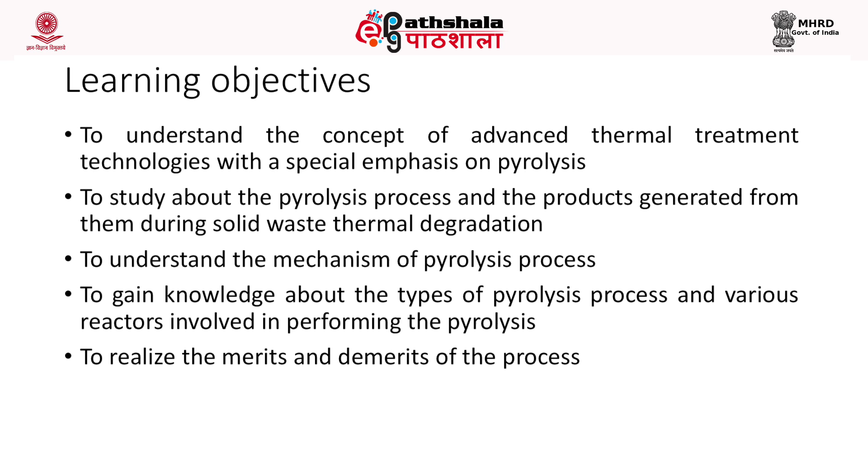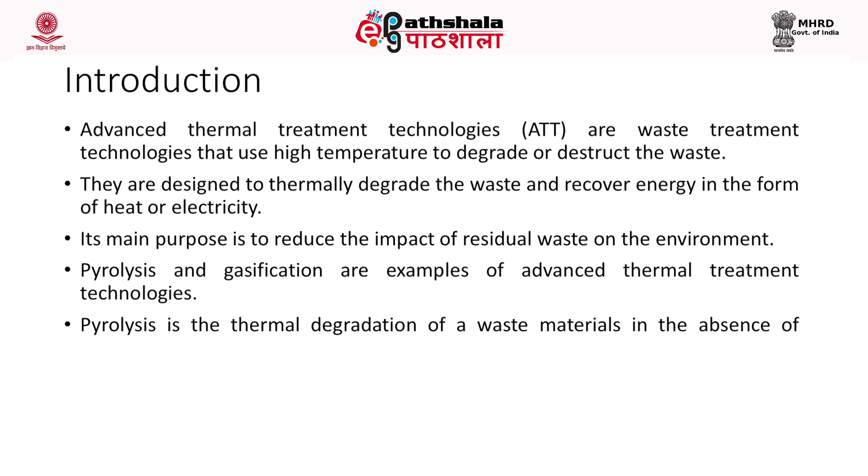As I told you earlier, advanced thermal treatment technologies are waste treatment technologies that use high temperature to destruct or degrade the waste. They are designed to thermally degrade the waste and recover energy in the form of heat or electricity. Its main purpose is to reduce the impact of residual waste on the environment. Pyrolysis and gasification are examples of advanced treatment technologies.

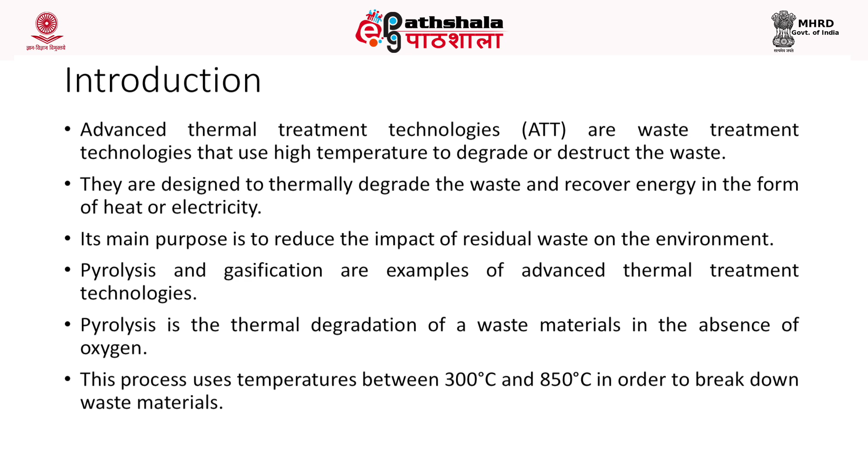Pyrolysis is a thermal degradation method where the waste is destructed or degraded in the absence of oxygen. That is nothing but burning the waste in the absence of oxygen at a very high temperature of 300 or 350 to 850 degrees Celsius.

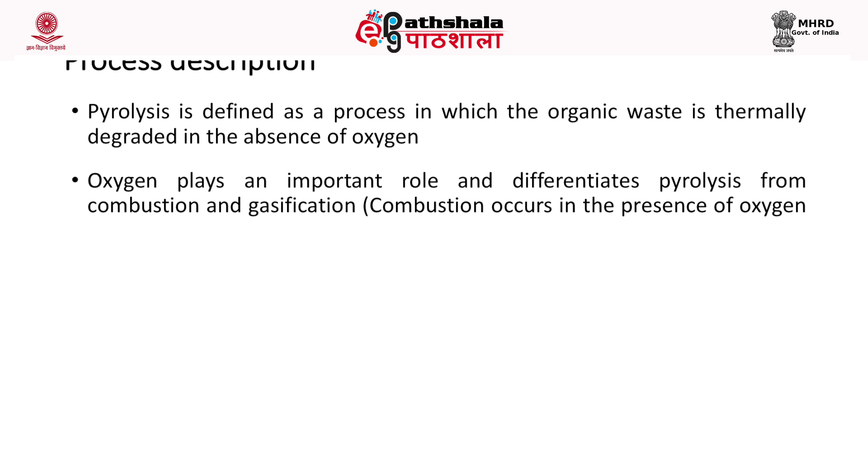Now, the process description: pyrolysis is defined as a process in which the organic waste is thermally degraded in the absence of oxygen. Oxygen plays an important role and it differentiates pyrolysis from combustion and gasification. Combustion is nothing but burning something in the presence of oxygen, whereas gasification or pyrolysis is degrading or burning the waste in the absence or a limited supply of oxygen.

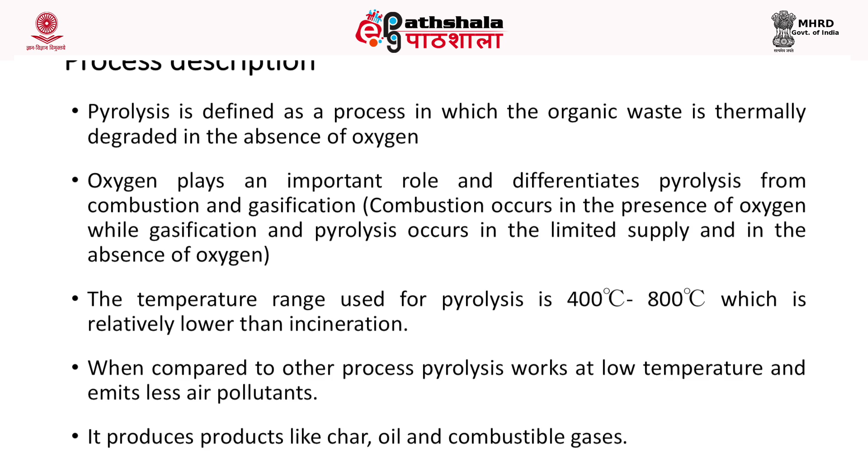The temperature used is generally between 400 to 800 degrees Celsius, which is comparatively lower than incineration. When compared to other processes, pyrolysis works at low temperature and thereby emits very less air pollutants, unlike incineration. It produces products like char, which is solid, oil, which is liquid, and combustible gases. It's a flexible process with the ability to produce these three compounds at varying levels by altering operating parameters such as temperature and heating rate. It also transforms low energy density waste into a biofuel of high energy density and high value chemicals.

These products that are produced at the end of the pyrolysis process have a wide range of applications in fuel application, as a chemical feedstock, and other energy extraction processes.

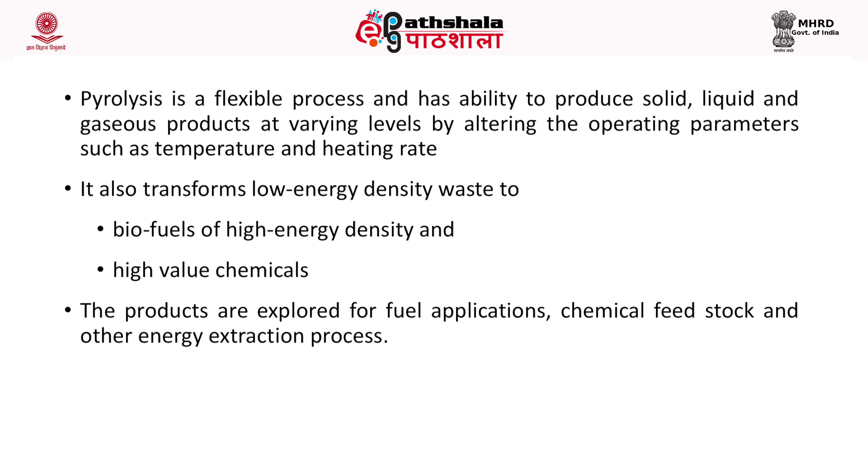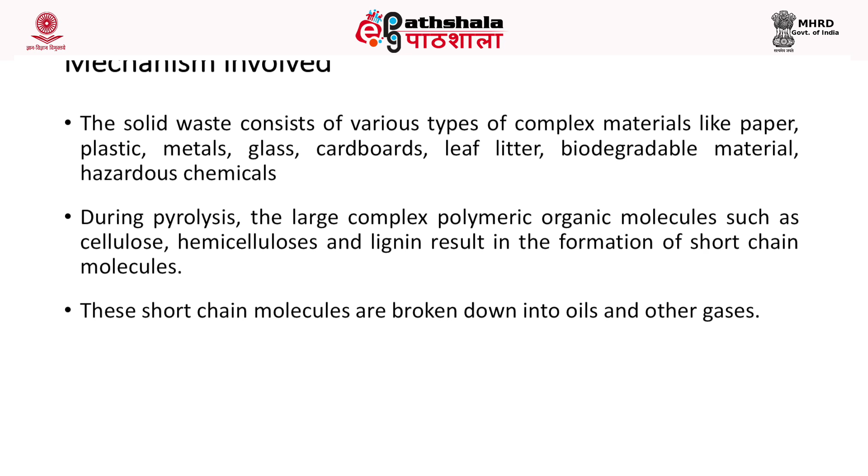The mechanism involved during pyrolysis is that solid waste, which consists of many complex materials like paper, plastic, metal, glass, cardboard, biodegradable material, hazardous chemicals and more, undergoes breakdown. The large complex polymeric organic molecules present in these materials, such as cellulose, hemicellulose, and lignin, result in the formation of short chain molecules. These short chain molecules are further broken down into solid, liquid, or gaseous products. Now let's discuss the various products produced in detail.

As I told you, pyrolysis produces three different products: char, oil and gaseous product. First, let's discuss char.

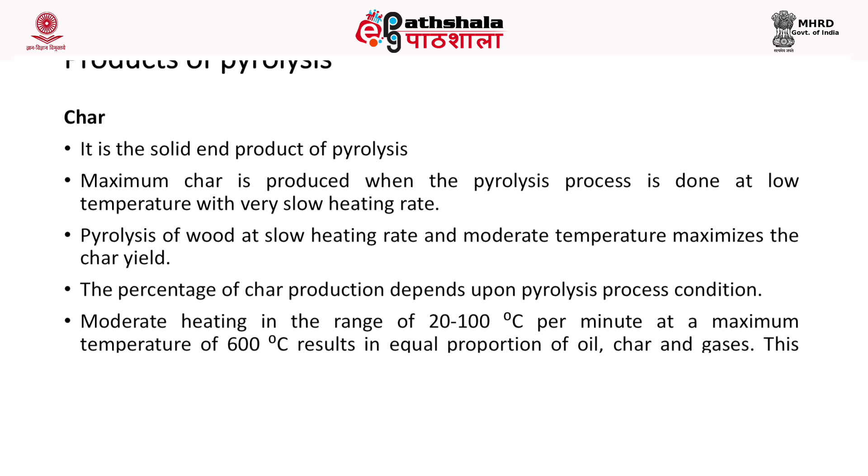Char is a solid end product, and the maximum char is produced when the pyrolysis process is done at low temperature with a very slow heating rate. Pyrolysis of wood at slow heating rate and moderate temperature maximizes the char yield. The percentage of char production depends upon the pyrolysis process condition. Moderate heating in the range of 20 to 100 degrees Celsius per minute at a maximum temperature of 600 degrees Celsius results in equal proportions of oil, char and gases. This method is called conventional or slow pyrolysis. The char produced from slow pyrolysis can be used as charcoal.

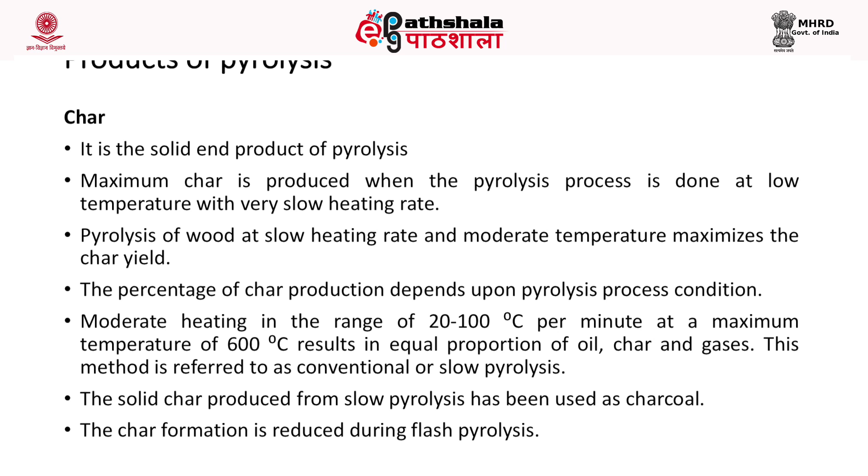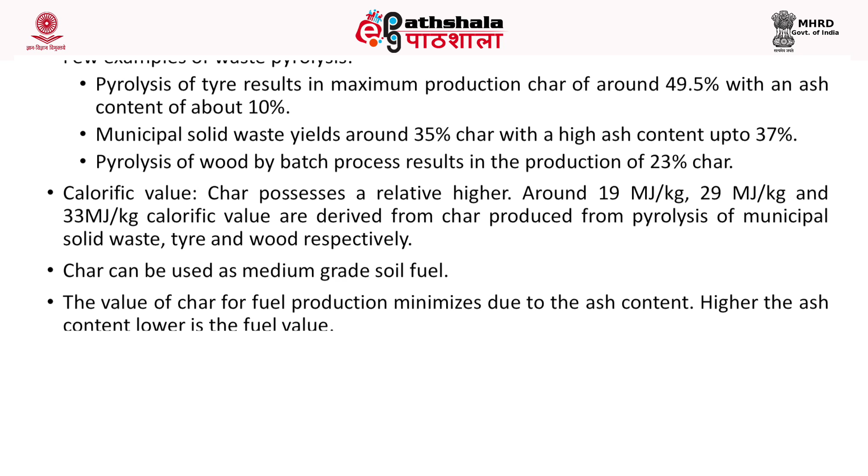Also, in flash pyrolysis, char production gets minimized or reduced. Now, a few examples of waste pyrolysis: pyrolysis of tire results in maximum production of char of around 49.5% with an ash content of about 10%. Likewise, municipal solid waste yields 35% char and an ash content of 37%, which is relatively high. Also, pyrolysis of wood by batch process results in char production of 23%.

Now, if you look into the calorific value, char possesses a relatively higher calorific value. Around 19 megajoules per kg, 29 megajoules per kg and 33 megajoules per kg calorific value can be derived from char produced from municipal solid waste, tire and wood respectively. Char can be used as a medium grade solid fuel. The value of char for fuel production minimizes due to the ash content, meaning higher the ash content, lower will be the fuel value. Char derived from wood can be suitable for fuel purposes as it contains very little ash, about 2%.

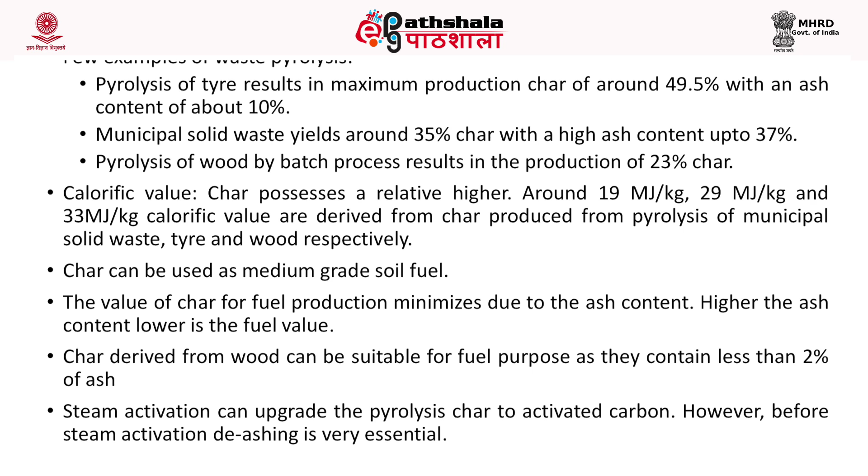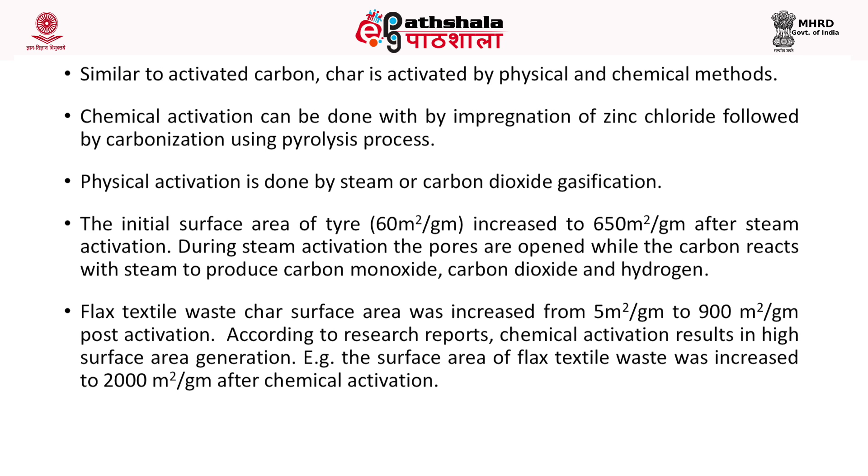Steam activation: the char that is produced should be activated. Steam activation can upgrade the pyrolysis char into activated carbon. However, before doing steam activation, de-ashing is very essential. Similar to activated carbon, char is activated by physical and chemical methods. Chemical activation is done by impregnation of zinc chloride followed by carbonization, and physical activation is done by steam or carbon dioxide gasification. The surface area of tire char, which is around 60 meters square per gram, can be increased up to 650 meters square per gram after steam activation.

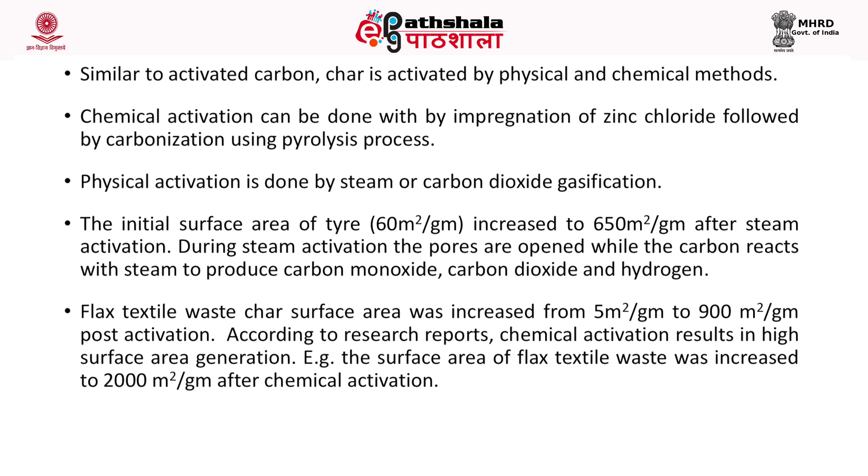This steam activation opens up the pores in the carbon once it reacts with the steam, and the carbon is converted into carbon monoxide, carbon dioxide and hydrogen. Likewise, flax textile waste char surface area can be increased from 5 meters square per gram to 900 meters square per gram after activation.

The second product, the liquid product generated from the pyrolysis process, is oil. The oil generated from pyrolysis contains a very high energy density per unit weight. It can be used as a fuel, and the composition of oil produced during pyrolysis consists of organic acids, phenols, alcohols, aldehydes, ketones and furans. The flash pyrolysis process produces the maximum amount of oil, about 70%. The oil generated from pyrolysis cannot be directly used as fuel and hence requires modification.

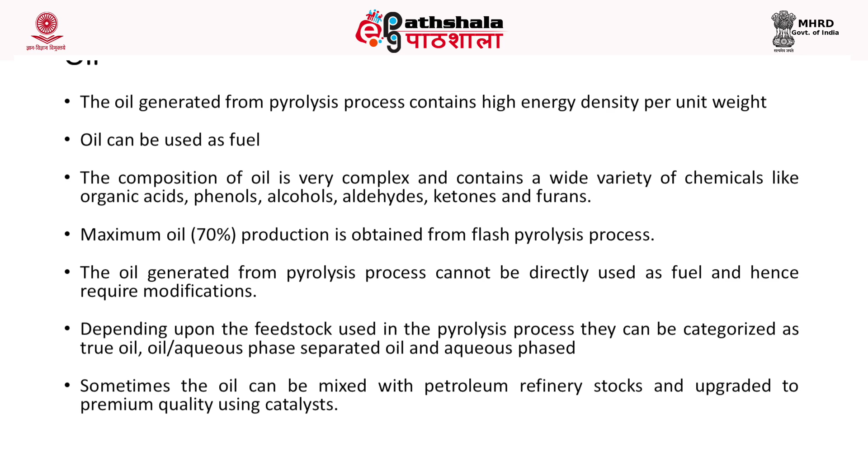Depending upon the feedstock nature, pyrolysis oil can be categorized as true oil, aqueous phase separated oil and aqueous phase oil. Sometimes the oil can be mixed with petroleum refinery stocks and upgraded to premium quality using certain catalysts. Oil generated from tire contains alkanes, alkenes, monoaromatic and polycyclic compounds, generating a waxy liquid. Some feedstocks like plastics also generate a waxy material during pyrolysis. Oil generated from biomass contains a very high extent of oxygen, around 35%, due to the presence of cellulose, hemicellulose and lignin. Even municipal solid waste, which contains paper, cardboard and wood, also generates oil with high oxygen content.

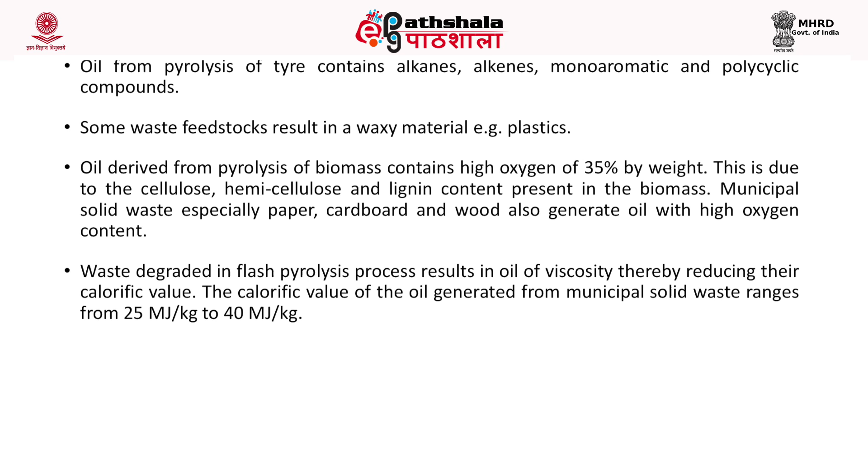Waste degraded in flash pyrolysis might result in an oil of high viscosity, thereby reducing their calorific value. The calorific value of oil generated from municipal solid waste ranges from 25 to 40 megajoules per kg. The oil generated from the pyrolysis process has a wide range of applications.

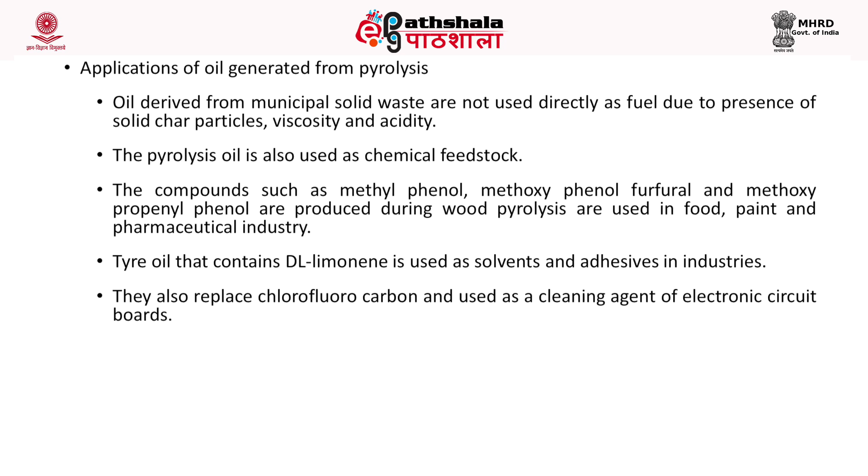For example, the oil generated from municipal solid waste cannot be directly used as a fuel because it contains very small solid char particles. Also, their acidity and viscosity is a little higher. The oil can be used as a chemical feedstock.

Compounds such as methylphenol, methoxyphenol, furfural, and methoxypropenyl phenol that are produced during wood pyrolysis can be used in the food, paint and pharmaceutical industry.

The oil generated from burning tire contains D-L-limonene, which can be used as a solvent and adhesive in industries. They can replace chlorofluorocarbon and can be used as a cleaning agent in electronic circuit boards. Benzene, toluene, xylene and styrene are used in chemical and pharmaceutical industry.

The waxy oil generated during plastic pyrolysis can be used in catalytic cracking to produce gasoline.

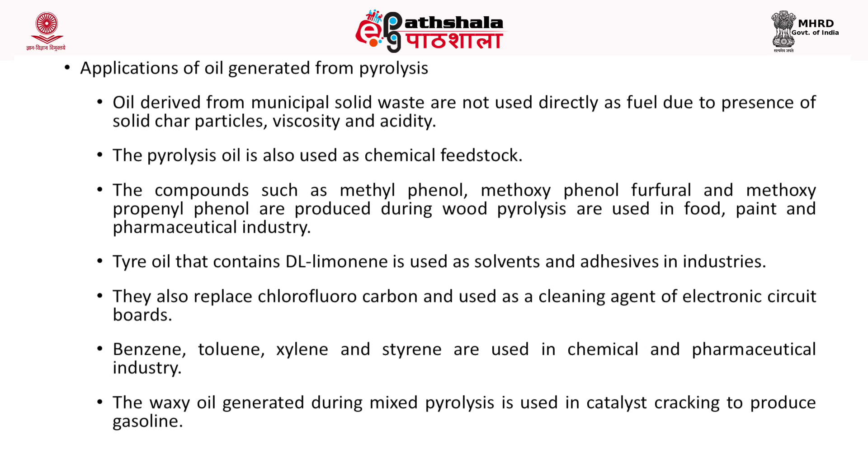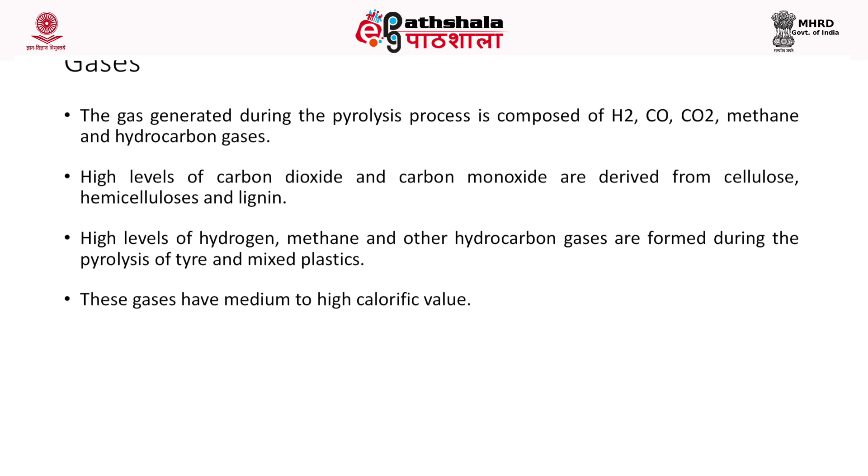The third compound produced during the pyrolysis process is the gases. The gases generated during pyrolysis consist of hydrogen, carbon monoxide, carbon dioxide, methane and other hydrocarbons. High levels of carbon dioxide and carbon monoxide are derived when the waste material contains cellulose, hemicellulose and lignin, that is biodegradable material.

High levels of hydrogen, methane and other hydrocarbons are formed during the pyrolysis of tire and mixed plastics. The gases produced at the end of pyrolysis have medium to high calorific value.

The conventional pyrolysis of municipal solid waste produces a gas of calorific value ranging up to 18 megajoules per meter cube, compared to wood, which produces 16 megajoules per meter cube.

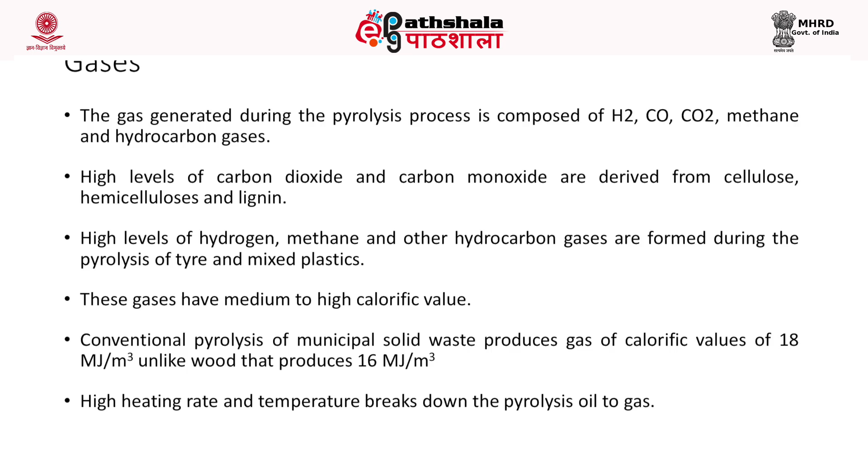High heating rate and temperature breaks down the pyrolysis oil into gas. The maximum calorific value is found during tire pyrolysis, which results in a calorific value of 40 megajoules per meter cube. Also, higher gas yields are generally produced when the material is kept in a hot zone for a long period of time.

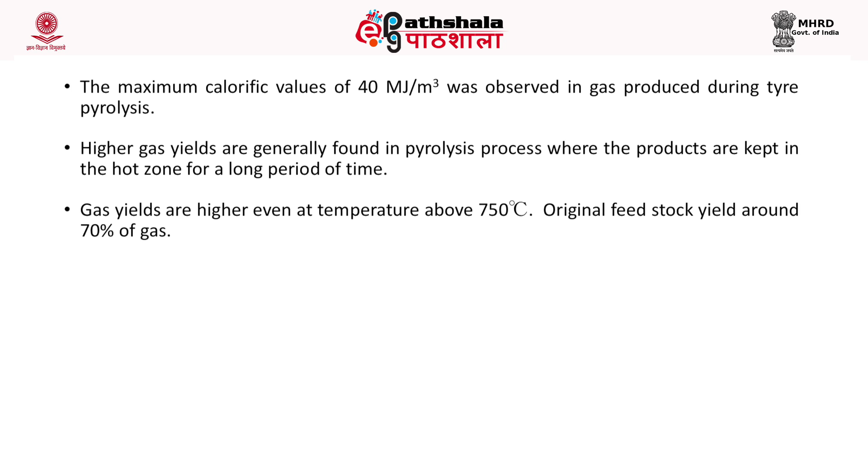Generally, the gas yields are much higher at a temperature above 750 degrees Celsius, and the gas generation will be around 70% at this temperature.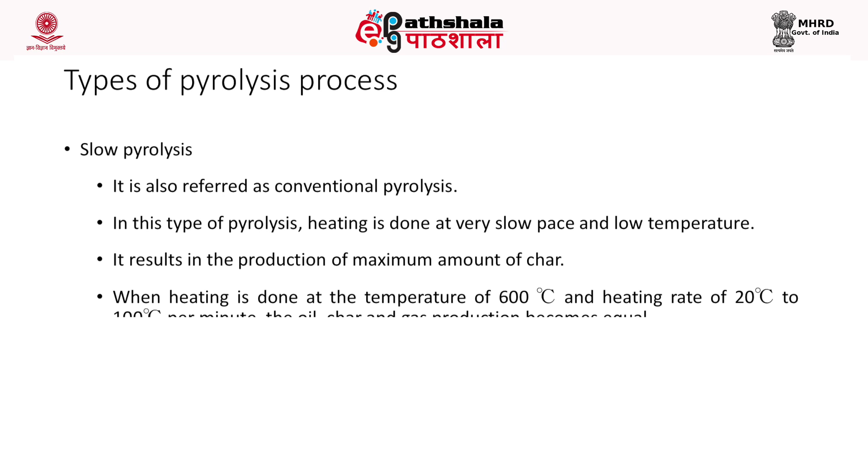Now let's discuss the different types of pyrolysis units or reactors used for the pyrolysis process: slow pyrolysis, flash or fast pyrolysis, and vacuum pyrolysis.

Slow pyrolysis is also referred to as conventional pyrolysis, and in this type the heating is done at a very slow pace at low temperature. This results in the maximum production of char.

It is performed by heating at a temperature of 600 degrees Celsius at a heating rate of 20 to 100 degrees Celsius per minute. The oil, char and gas production become equal at this condition.

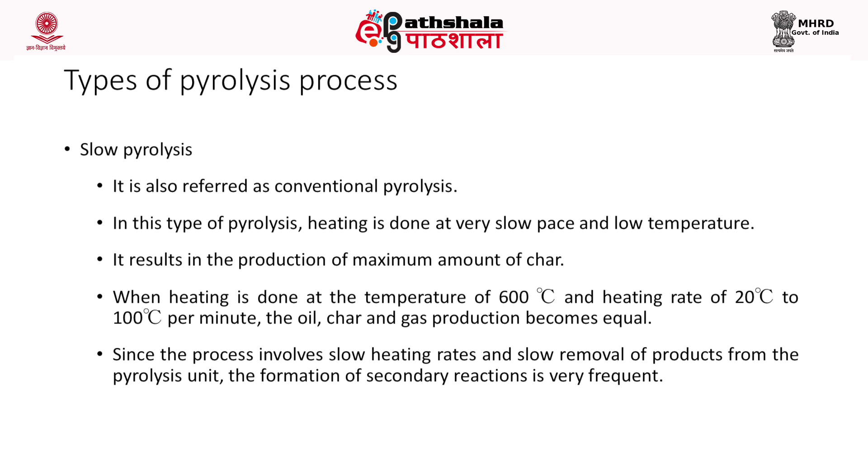Since the process involves a slow heating rate and slow removal of products from the pyrolysis unit, the formation of secondary reactions is very frequent. The fast or flash pyrolysis involves a temperature below 650 degrees Celsius and a very high heating rate.

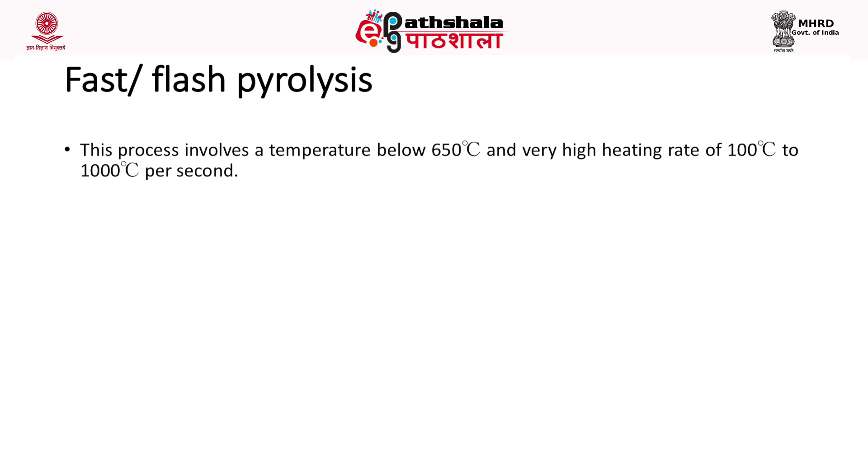The heating rate ranges from 100 to 1000 degrees Celsius per second. This process results in a liquid yield of 70% with a minimum amount of char and gas.

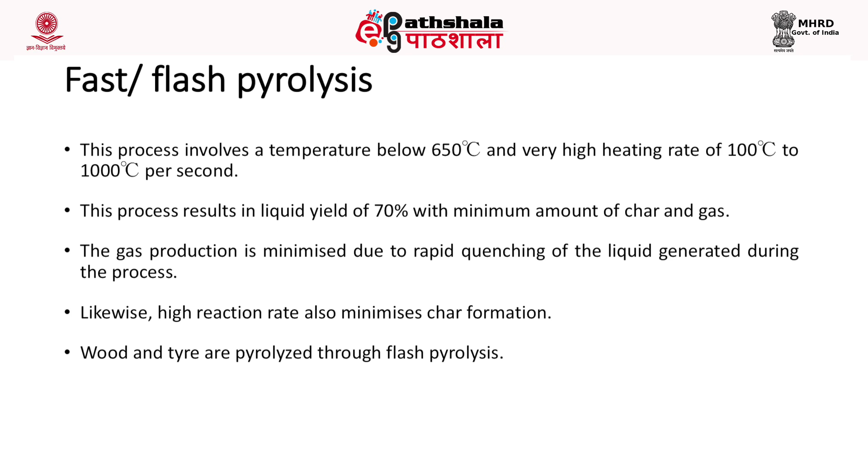The gas production is minimized due to rapid quenching of the liquid generated during the process. Likewise, high reaction rate also minimizes char formation. Generally, wood and tire are pyrolyzed using the flash pyrolysis process.

Vacuum pyrolysis is carried out at a very low pressure of about 5 kilopascals. It involves a very short residence time and a low decomposition temperature, which reduces the occurrence and frequency of secondary reactions.

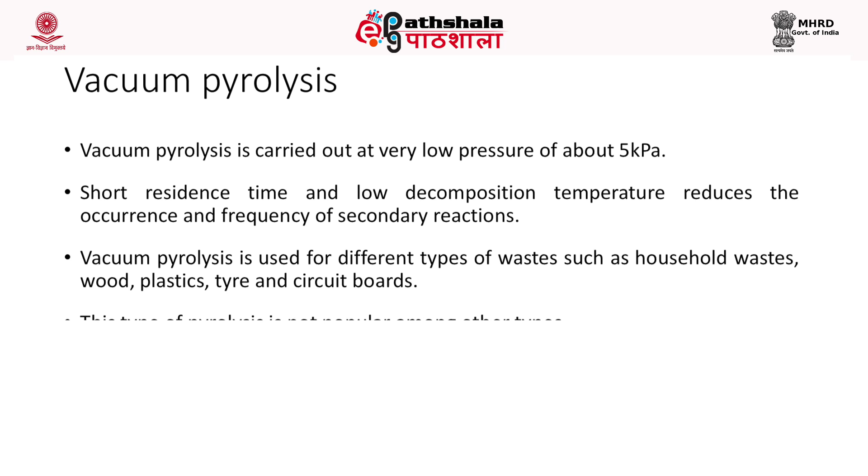Vacuum pyrolysis can be used for different types of waste, starting from household waste, wood, plastic, tire, and even circuit boards can be pyrolyzed. This type of pyrolysis is not popular among the other types.

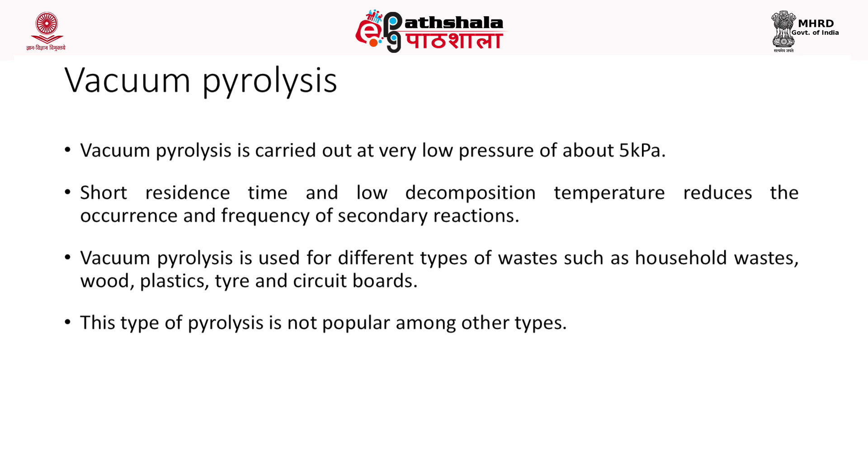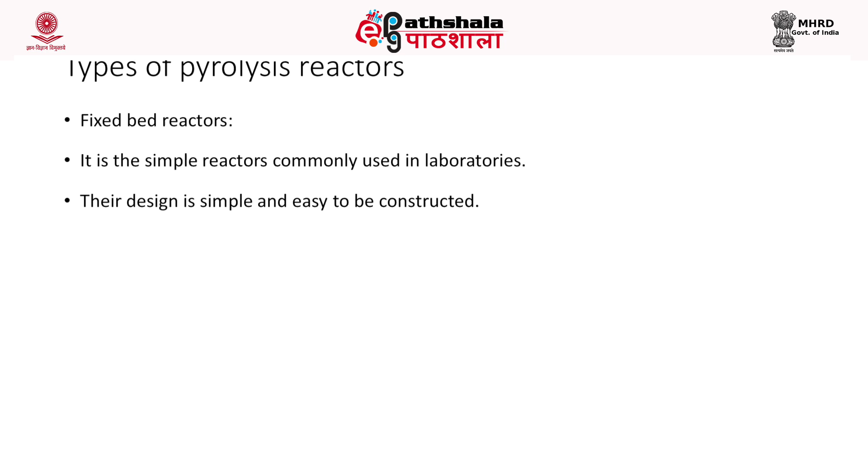Now we'll discuss the pyrolysis reactors. Fixed bed reactors are simple reactors which are commonly used in laboratories for the pyrolysis process. They are simply designed and easy to construct. The reactor is generally made of stainless steel and is heated externally through an electric furnace.

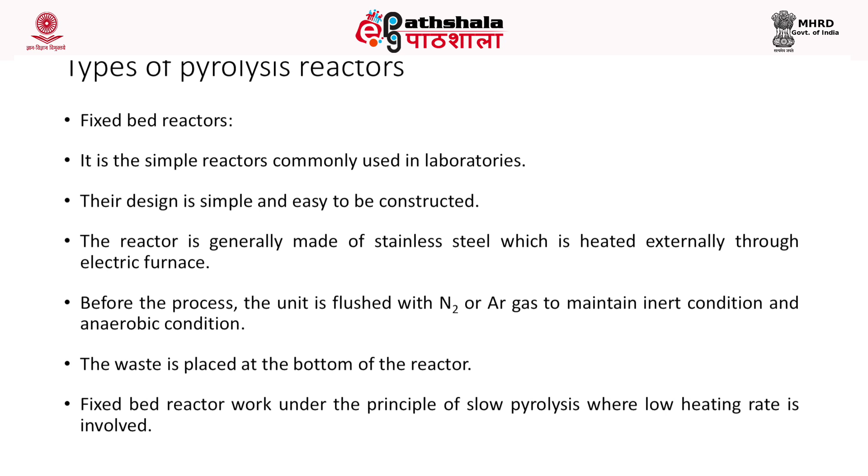Before the process, the unit has to be flushed with nitrogen or argon to maintain an inert, oxygen-free condition, because pyrolysis is done in the absence of oxygen. The waste is placed inside the reactor at the bottom, and generally the fixed bed reactor works on the principle of slow pyrolysis, where the heating rate is very low.

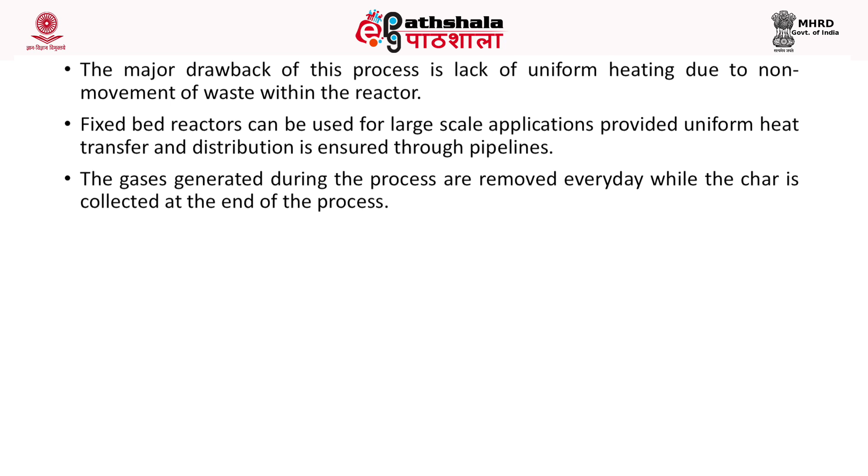The drawback of this particular process is lack of uniform heating due to non-movement of waste within the reactor, and fixed bed reactors can be used for large scale applications only if the heat transfer and distribution is uniform. The gases generated during the process are removed daily while the char is collected at the end of the process. The second type of reactor is a batch reactor.

In this reactor, the waste is loaded, sealed and then operated. No addition of reactants or products is done during the operation. A high conversion rate is generally observed in this type of closed reactor. Even semi-batch reactors can be used where addition of reactants and removal of products is allowed. At the end of pyrolysis, the product is not uniform for every batch process. This might be the major disadvantage of semi-batch reactors.

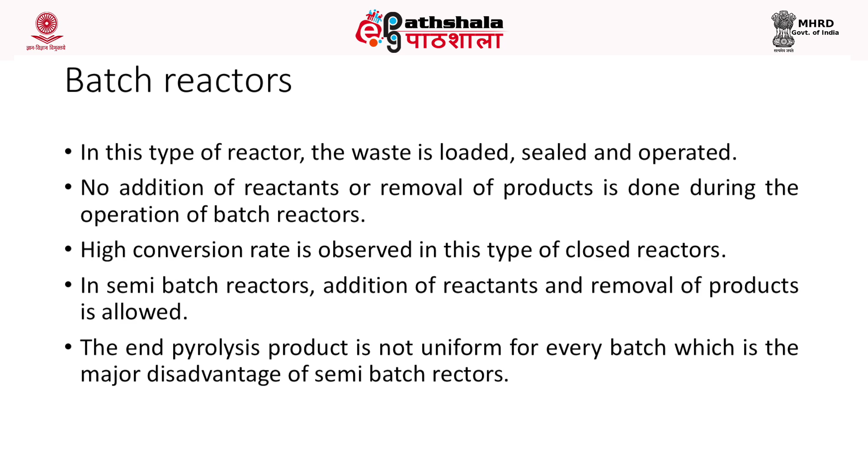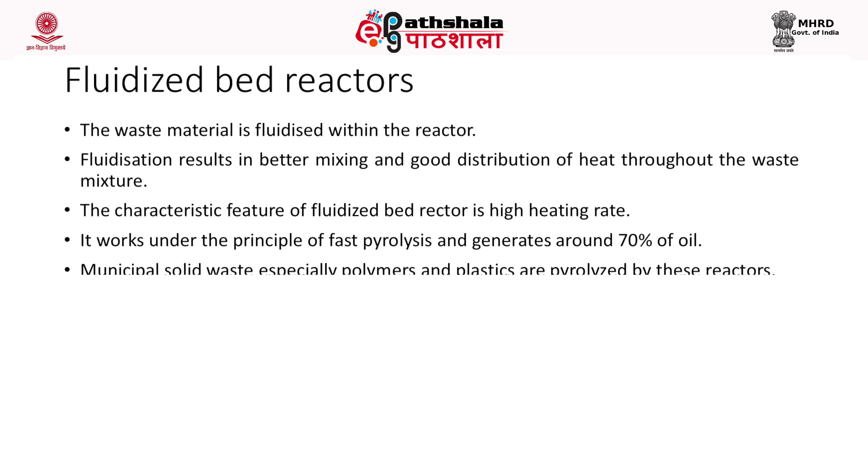The third type of reactor is a fluidized bed reactor, where the waste material is generally fluidized within the pyrolysis unit. Fluidization generally results in mixing and good distribution of heat throughout the waste. The characteristic feature of fluidized bed is high heating rate. It works under the principle of fast pyrolysis and generates around 70% of oil.

Municipal solid waste, especially the polymers and plastics, are pyrolyzed using fluidized bed reactors. Polymers possess a characteristic feature of low thermal conductivity and high viscosity. High heating efficiency and heat distribution in fluidized bed reactors always facilitate the cracking of these polymers.

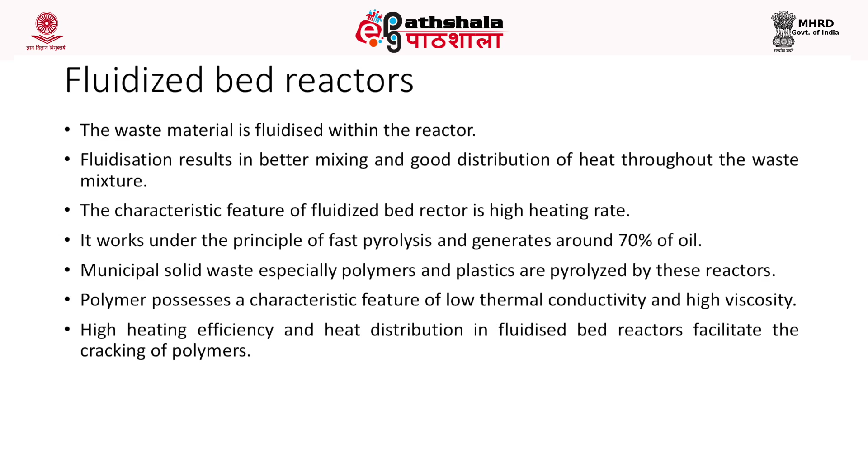However, these reactors suffer from two main problems. One, the char separation from the reactor is very difficult, and better fluidization is achieved with particles of smaller size. The waste requires pre-treatment before pyrolysis, and after collection the material has to be sorted, dried and crushed into small pieces before loading into the reactor.

Plastics and paper can be sized up to 5 mm, while the biomass should not be more than 1 centimeter before adding into the pyrolysis unit. The fluidized bed reactors are very difficult to be scaled up and hence are normally used in laboratories.

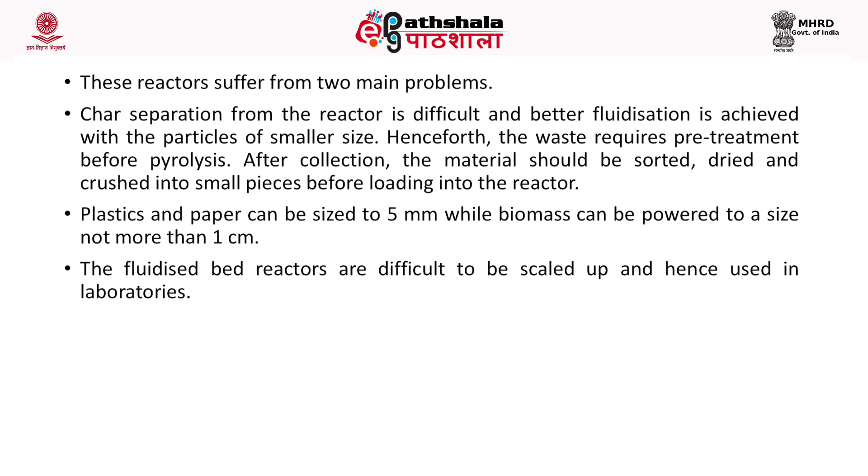Next type is a spouted bed reactor. These reactors are generally operated in a continuous mode. It follows a flash pyrolysis method and is used again for polymer pyrolysis. Polymers like polystyrene, polyethylene, polypropylene, polyethylene terephthalate, that is PET bottles, all these are thermally degraded in spouted bed reactors. Now, low bed segregation and low attrition make this reactor more advantageous over the fluidized bed reactor.

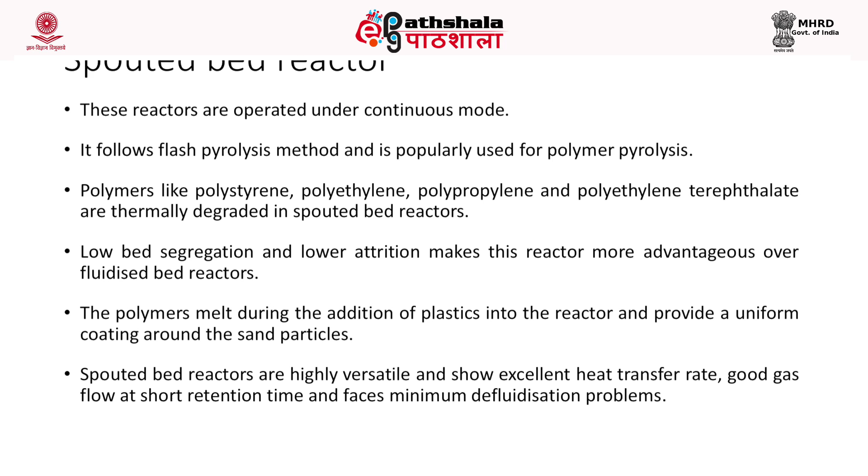The polymers generally melt during the addition of plastics into the reactor and provide a uniform coating around the sand particles. Spouted bed reactors are highly versatile and show excellent heat transfer rate, good gas flow at a very short retention time, and face minimum defluidization problems.

Like fluidized bed reactors, spouted bed reactors also operate at a smaller size feedstock. Irregular texture, fine particles, sticky solids and those with wide size distribution can be pyrolyzed in spouted bed reactors.

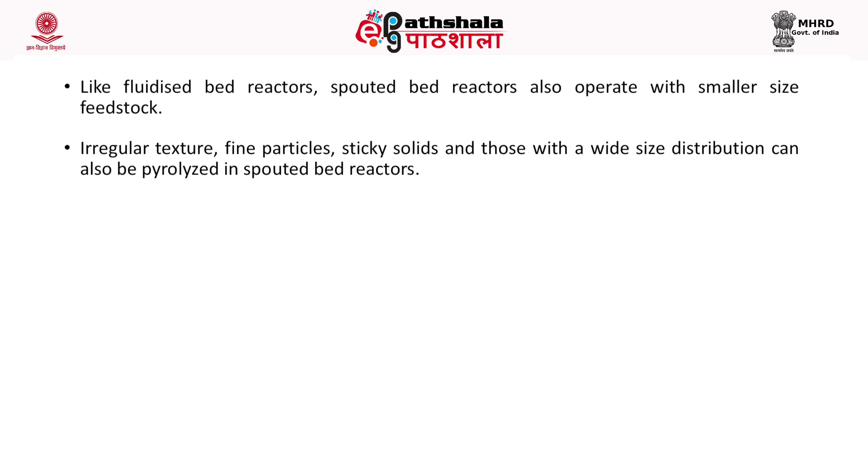The next type is the rotary kiln reactor. They use slow pyrolysis for the thermal degradation of municipal solid waste. It is the only type of reactor that can be used at an industrial level. The waste material is broken down at a temperature of 500 degrees Celsius at a residence time of 1 hour.

Like the spouted bed reactors, minimum pre-treatment is also required for this type of reactor. The waste should be sorted, shredded and used as feedstock. Rotary kilns are operated both in batch as well as continuous process. They show better heat transfer ability when compared with fixed bed reactors. Again, they are less complicated than fluidized bed reactors.

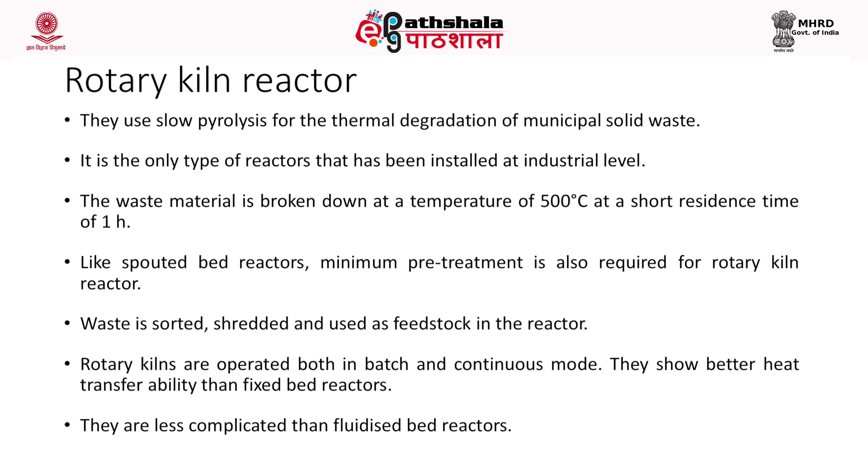The residence time is one important factor that determines the efficiency of pyrolysis in this type of reactor. The energy received by the charge at a given rate is determined by the residence time, which is a function of volumetric flow and rotational speed of the kiln. A slow rotational speed of the kiln enables better waste mixing, resulting in formation or production of uniform products.

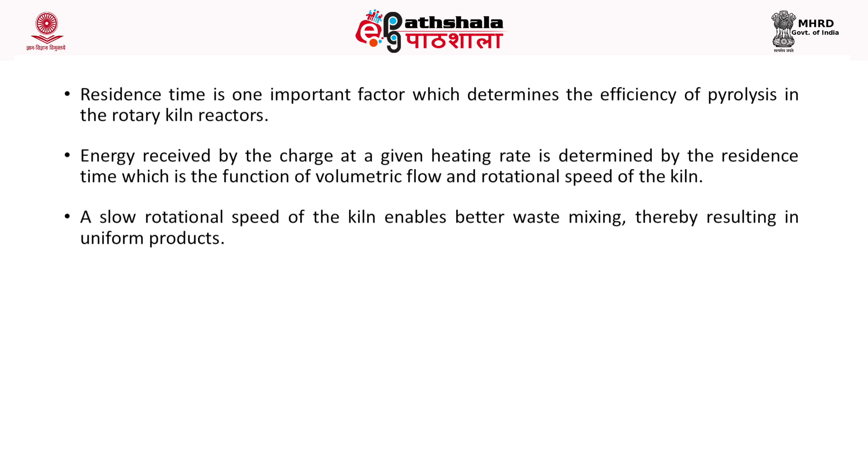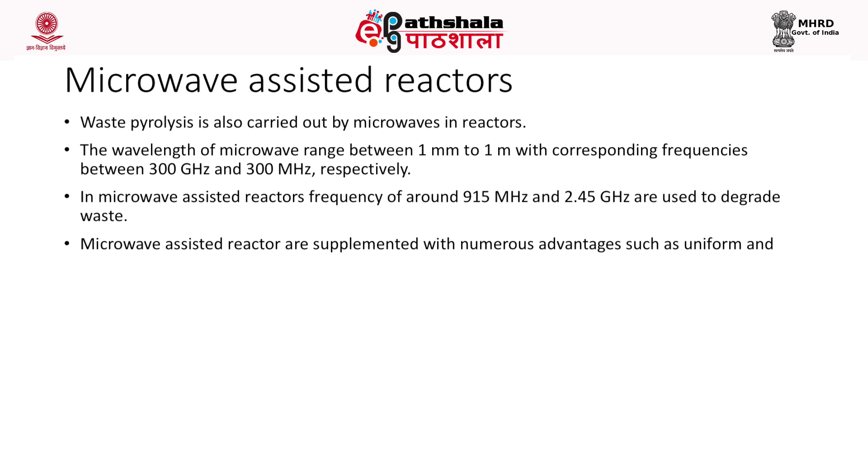Microwave assisted reactors. The waste pyrolysis can also be carried out in reactors operated with microwave. As you all know, the wavelength of microwave ranges from 1 mm to 1 meter, and the corresponding frequency will be 300 gigahertz to 300 megahertz.

In a microwave assisted reactor, the frequency used is between 915 megahertz to 2.45 gigahertz. At this frequency, the waste is pyrolyzed. Microwave assisted reactors are generally supplemented with a lot of advantages like uniform and fast heating, rapid startup and shutdown, good control and high energy efficiency.

Now, these reactors do not require any agitation. However, there are some disadvantages associated with microwave-assisted reactors. Like, the organic vapors generated during the process should be removed immediately to avoid cracking of the products. Also, the particle size should be taken care of. They involve high operating cost, since they are very energy intensive processes. Paper, biomass, plastics are generally pyrolyzed in microwave assisted reactors.

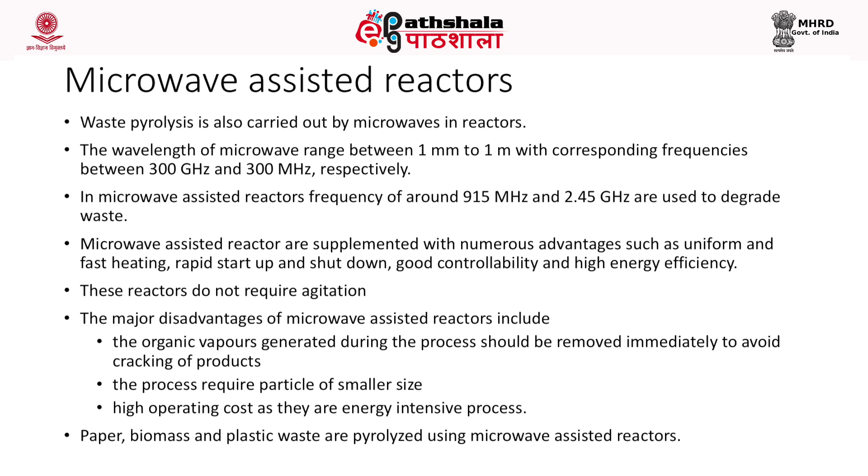Plasma reactor uses plasma for destructing the waste. Plasma is nothing but an ionized gas with negatively or positively charged ions, generated by subjecting the gas to a strong electromagnetic field. Plasma is considered the fourth state of matter, and it is of two types: high temperature or fusion plasma, and low temperature or gas discharge plasma.

Thermal plasma generation can be done by various methods such as radio frequency induction, microwave discharge, or alternating and direct current. Plasma burns the waste, releasing volatile matter, and the waste is cracked into hydrogen and hydrocarbons such as methane and acetylene. Plasma pyrolysis also produces combustible gases like hydrogen, carbon monoxide, methane, and a solid residue. The heating value of the gases ranges from 4 to 9 megajoules per normal cubic metre. The process is easy to manage and works effectively at low power.

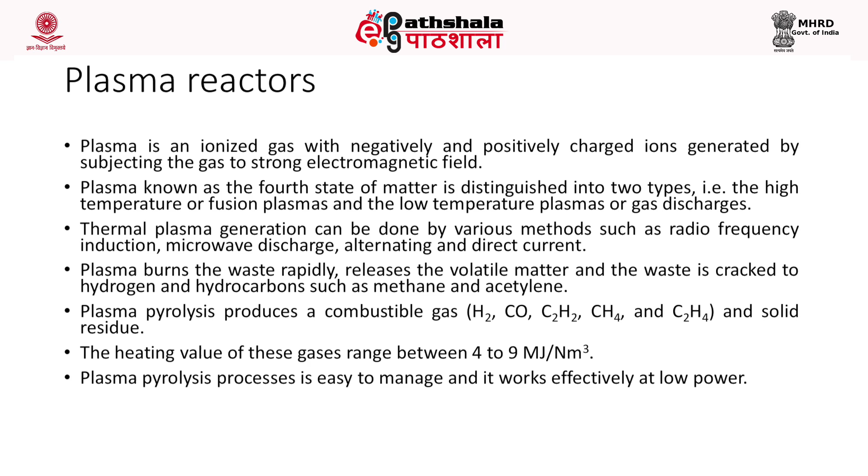The last type of reactor is the solar reactor, where you have a transparent Pyrex balloon reactor with a graphite crucible insulated with black foam, located at the focus of a 1.5 kilowatt vertical axis solar furnace. It is generally used for wood pyrolysis and operated under inert conditions by supplying argon gas. The temperature ranges from 600 to 2000 degrees Celsius. It does not require any additional heating source, and yields around 14% char at 600 degrees Celsius with a heating rate of 50 degrees Celsius per second.

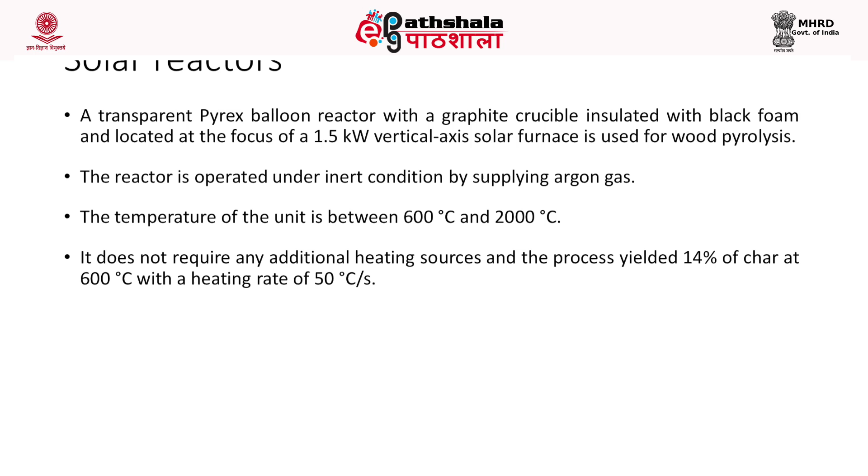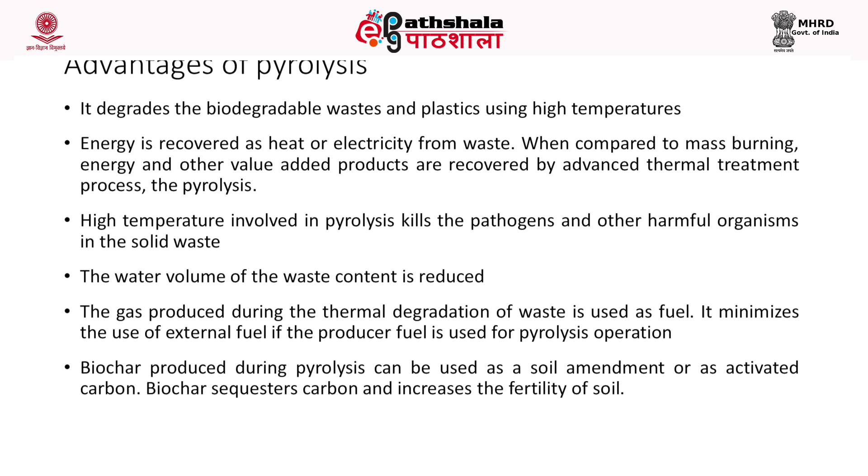The gas produced during thermal degradation can be used as a fuel, minimizing the use of external fuel if producer gas is used for the pyrolysis operation. The char produced during pyrolysis can be used as a soil amendment or as activated carbon. There are also reports saying biochar can sequester carbon and increase soil fertility. The oil produced can be combusted directly in boilers and engines.

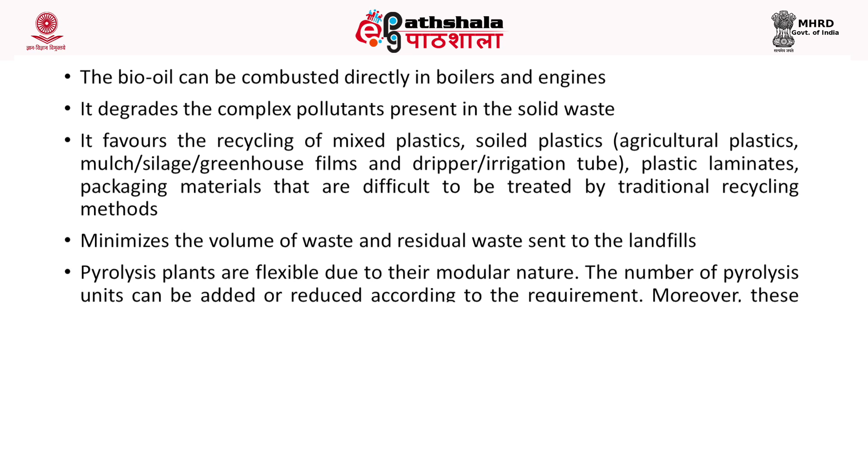The pyrolysis unit also possesses the potential to degrade complex pollutants present in solid waste. The recycling of mixed plastic, soiled plastic, plastic laminates, and packaging materials, which are difficult to treat by traditional recycling methods, can be pyrolyzed in the pyrolysis unit. It also minimizes the volume of waste and reduces the waste sent to landfill.

Pyrolysis plants are also very flexible and modular in nature, meaning the number of units can be added. Moreover, they are very easy to construct. The pyrolysis unit also produces very low air pollutant emission levels, unlike the incineration process.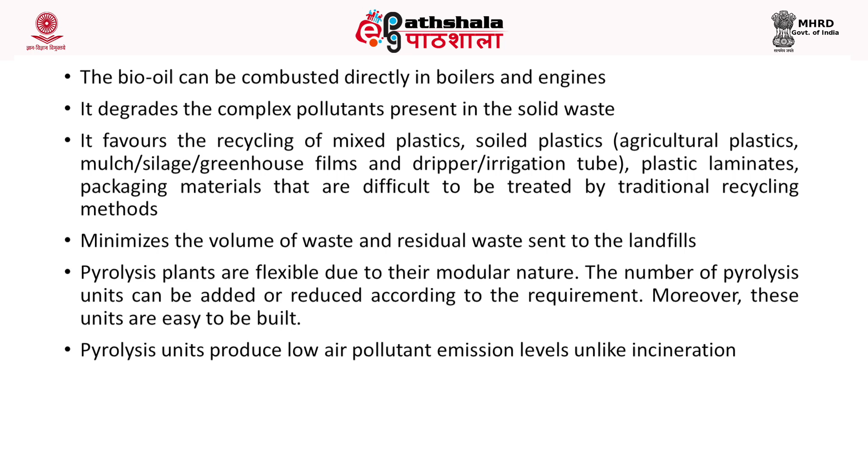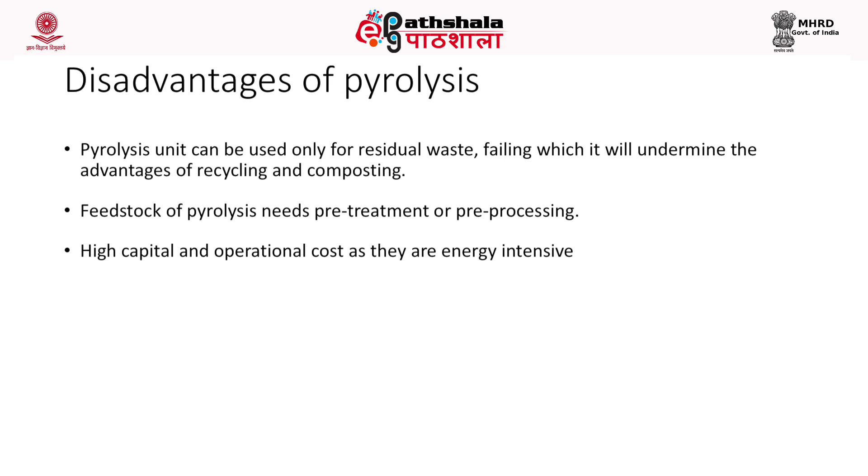Now coming to the disadvantages of pyrolysis: it can only be used for residual waste which cannot be recycled or composted. The feedstock of pyrolysis always needs pre-treatment or pre-processing. The process is energy intensive, needing high capital and operation costs. It requires skilled operators, and air pollution control devices should be installed. The ash generated during thermal degradation might contain heavy metals and hence needs safe disposal.

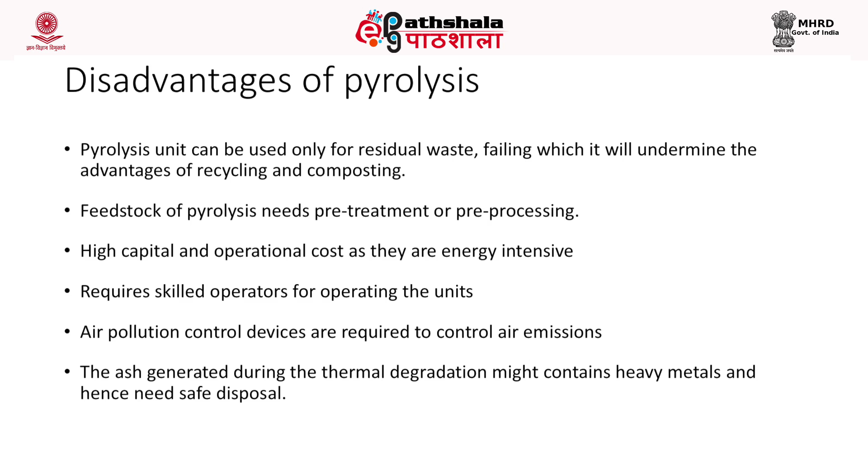To conclude, at the end of this module, I'm sure you would have understood about the advanced thermal treatment technology that is pyrolysis. We discussed what pyrolysis is and how it is done, how high temperature in absence of oxygen destructs the waste into 3 different products: the solid, which can be char, the liquid, which is oil, and a gaseous product, which is combustible.

We also discussed 3 different types of pyrolysis process: fast, slow, and vacuum pyrolysis. We discussed the different reactors used for the pyrolysis process, starting from the solar reactor, plasma reactor, microwave-assisted reactors, and so on. Then we ended by discussing the various advantages and disadvantages of the pyrolysis process. Thank you.